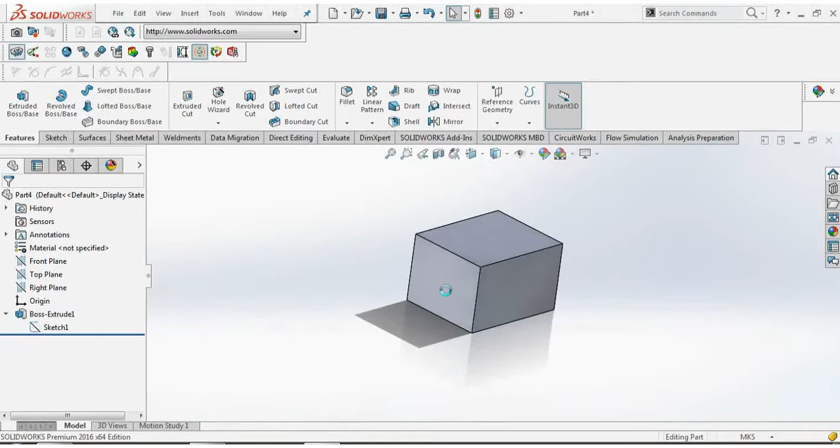I have already designed the box. If you are new, click on the I button and watch how to extrude.

Center lines are annotations that mark the center of a circle, rectangle, square, or any shape, and describe the geometry size on drawings. In each design, we will utilize it.

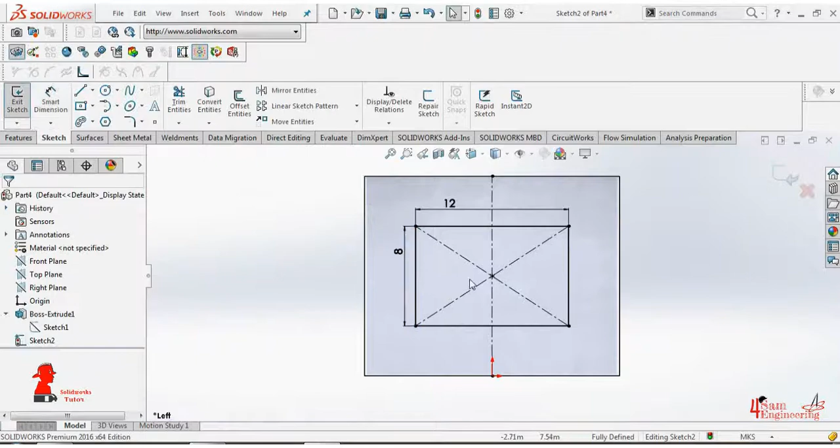To show you how to loft cut, draw two rectangles on opposite sides of the box. We can loft between any two patterns.

Move to the Lofted Cut feature. Select one side from each rectangle. It must be parallel to the other. Let's finish this home.

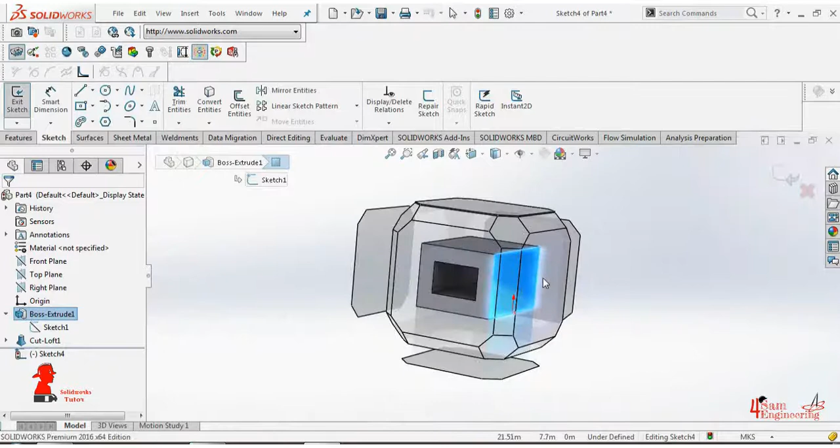Draw a corner rectangle.

Fillet the edges. We have discussed fillet in a previous video. You can check it out in the I button.

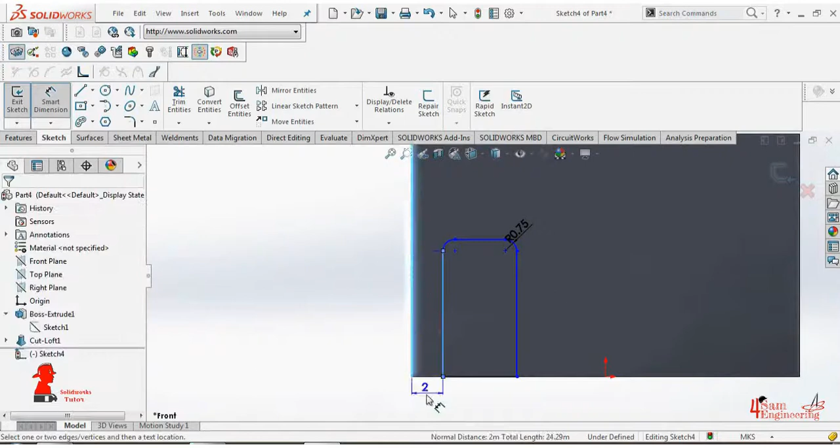Dimensions are important. Make sure you settle them correctly.

Make sure you select a sketch on the face plane that you need to draw on.

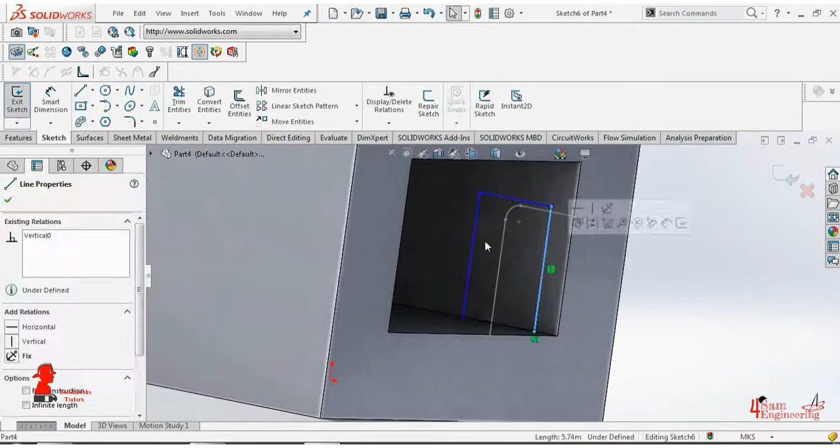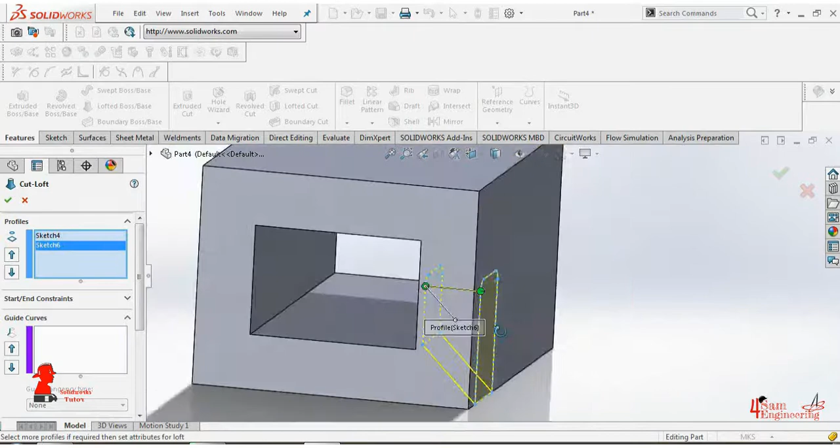Use the Lofted Cut feature to subtract the home's door place. We can use extruded cut instead of that, but it's your call.

In a similar way to all the window holes, draw a rectangle from the exterior wall, get on the interior side and sketch it up, then cut it off.

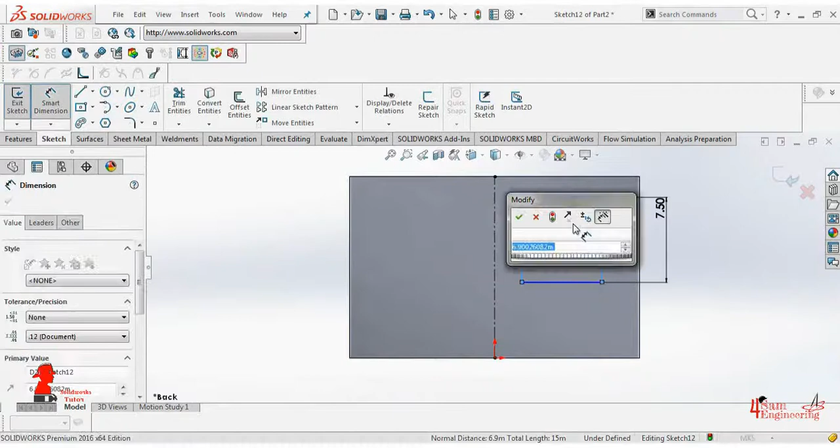Keep in mind, appoint the patterns in parallel to get an orderly structure.

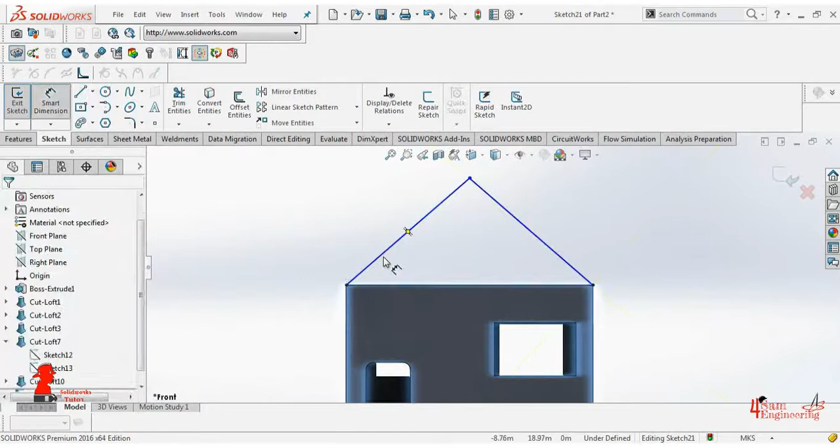We have spoken of the Lofted Boss feature. You can hit the I button and check it out.

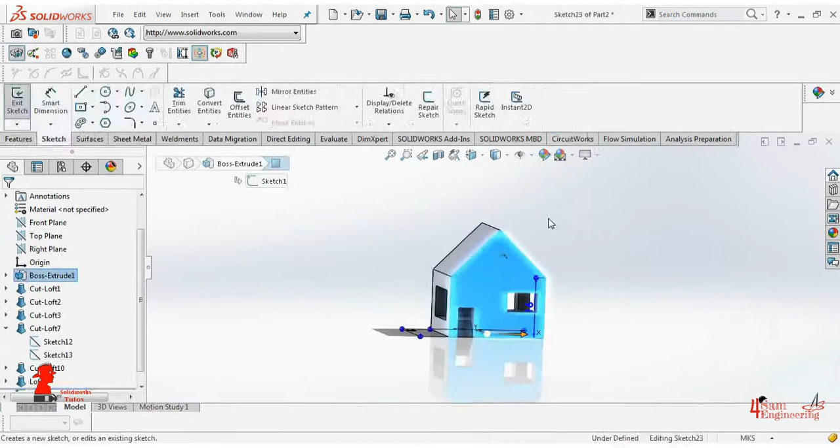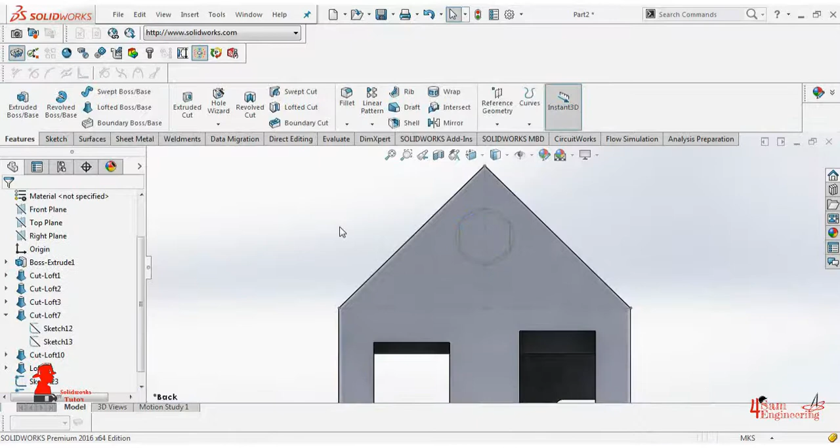Let's try to loft cut between different shapes, a circle and a polygon.

The home is almost done.

We have explained offset, extrude cut, and extrude boss. We're gonna use these features to draw a door and windows.

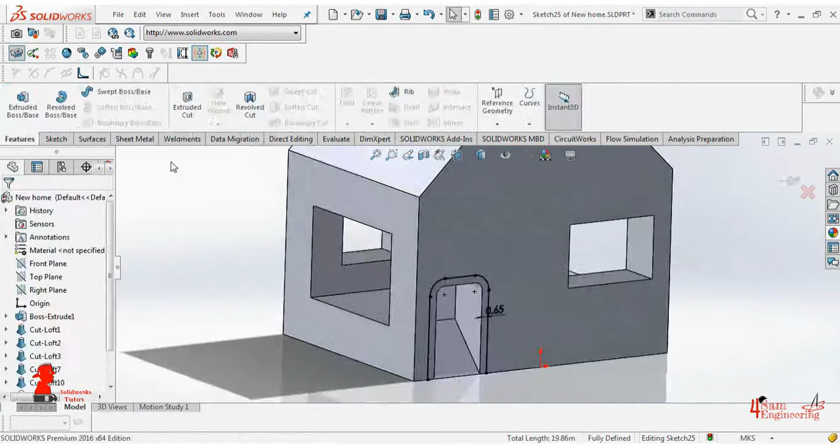There are many directions in extrude boss. We used to choose the blind direction, but today let's try out the mid plane. It doesn't make much sense in this design. Later, I'll use each direction in an appropriate design.

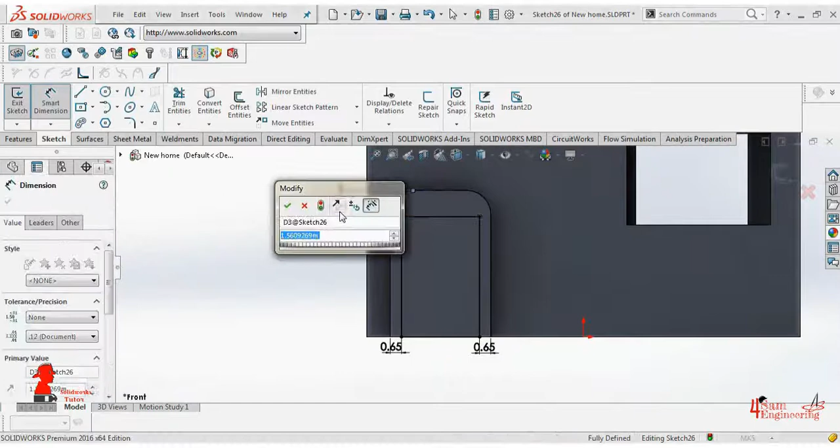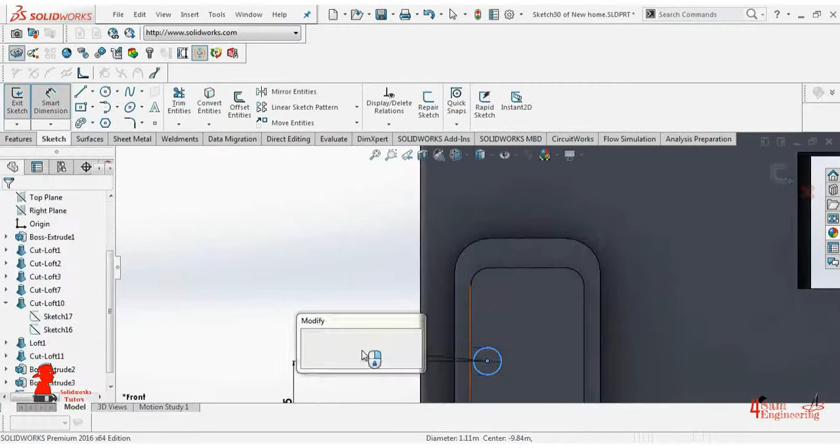In 3D sketching, a graphical space handle helps maintain your orientation while you sketch on several planes. The space handle appears when the first point of a sketch entity is defined on a selected plane. Using the space handle, you can select the axis along which you want to sketch.

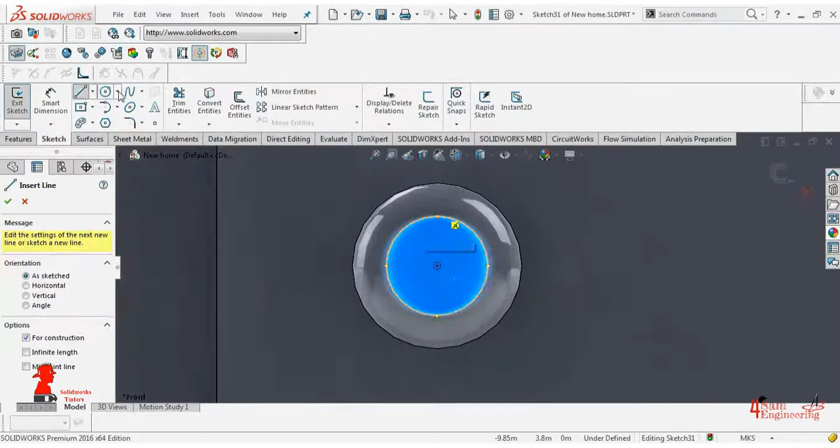Let's use the 3D sketch to draw the door's grip. To change orientation, press Tab on the keyboard.

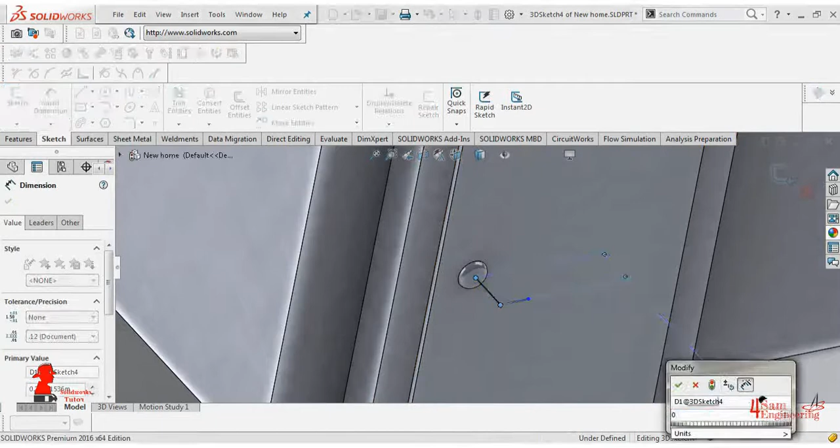We already discussed revolved boss and fillet. Hit the I button, you'll find them out.

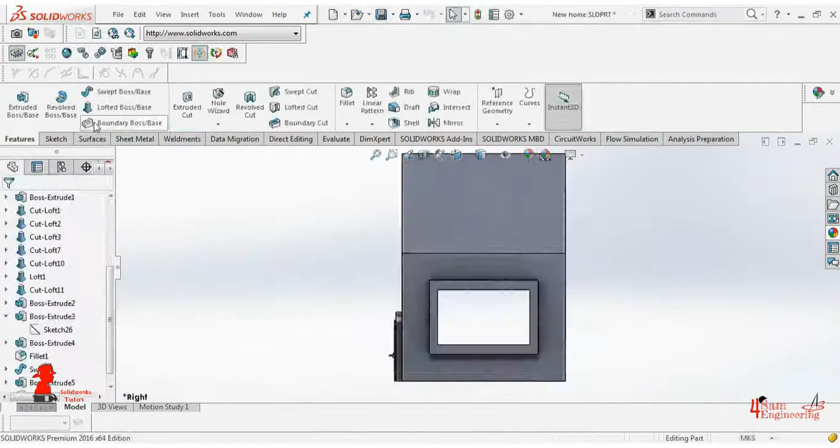To create the window, do the same steps that we did to the door, but instead of mid-plane direction, select blind reverse direction. I have already added clear glass material.

Later on, I'll show you how to add materials. We have mentioned how to add a plane. Let's design this smokestack on this new plane.

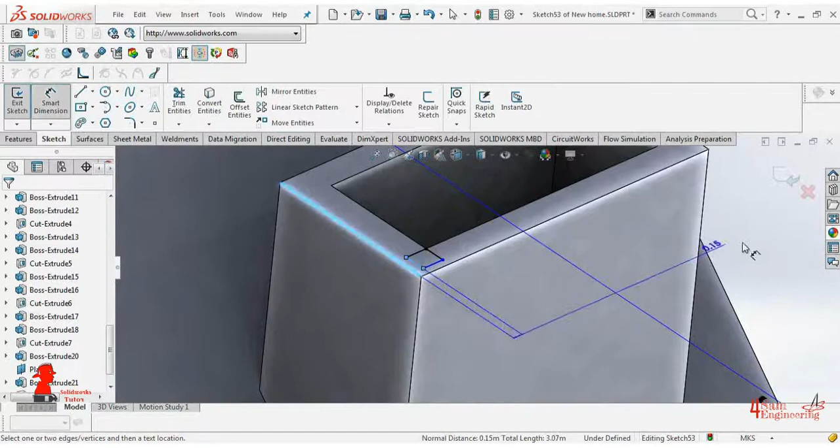The mirror feature helps us to save time. We're gonna use it a bunch.

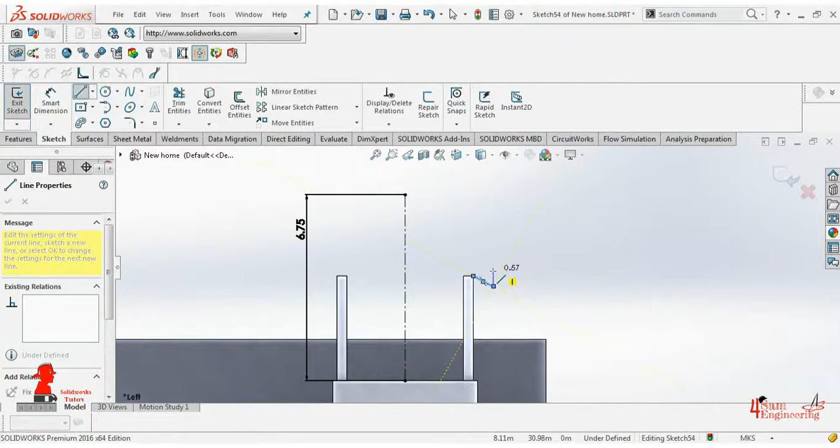It's another direction type, up to surface. All types are workable. It's your call to choose the easiest direction to complete your design.

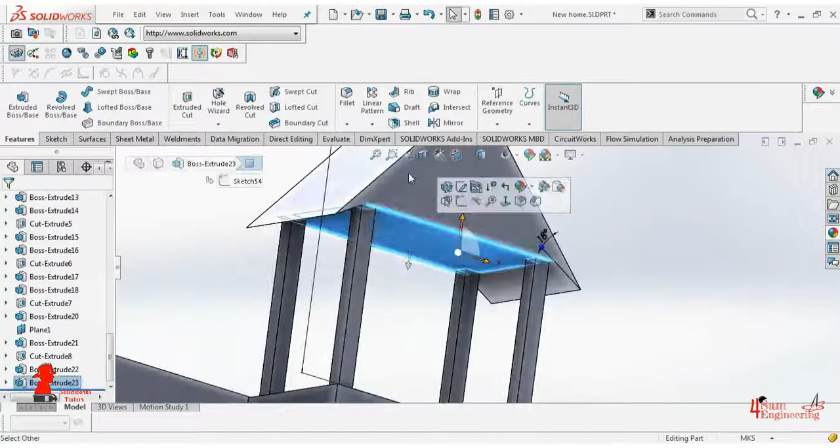And finally, shell the head of the smokestack.

I hope this video was helpful.